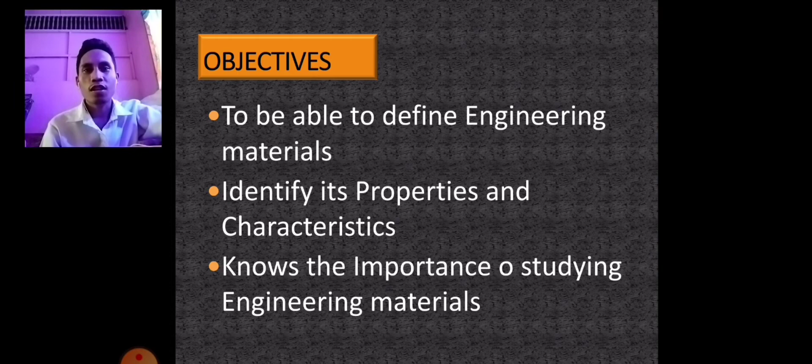Let's have first the definition of material science: the study of the properties of solid materials and how those properties are determined by material composition and structure. It includes elements of applied physics and chemistry, as well as chemical, mechanical, civil, and electrical engineering.

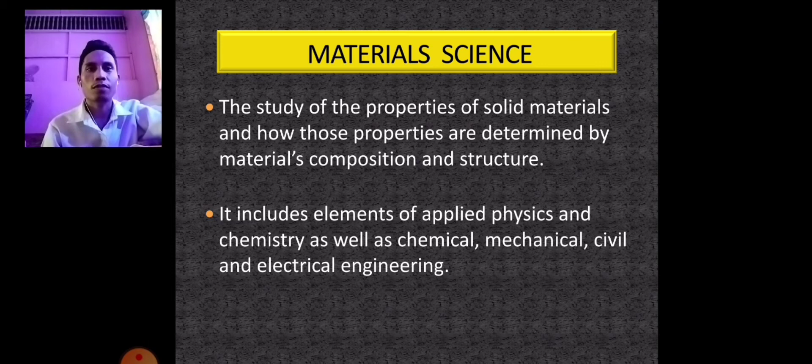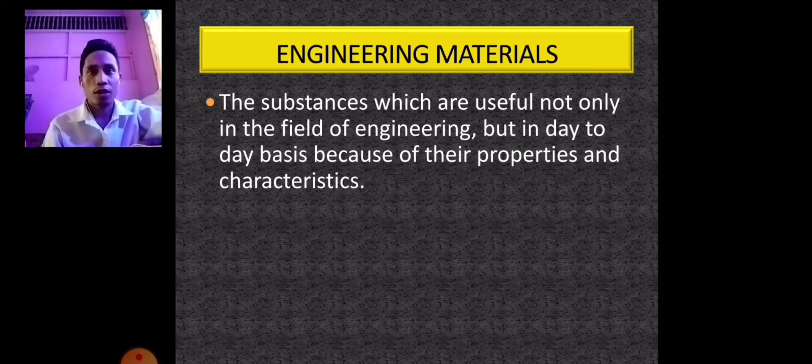Engineering materials are substances which are useful not only in the field of engineering, but on a day-to-day basis because of their properties and characteristics. Because we are dealing with engineering materials, we will be focusing on metals. These materials enable people to explore new designs and implementation of new products to improve the quality of modern life.

Properties of materials: the term property is a qualitative or quantitative measure of response of materials to externally imposed conditions like forces, temperature, etc. These properties include physical, mechanical, optical, thermal, electrical, chemical, magnetic, and technological properties.

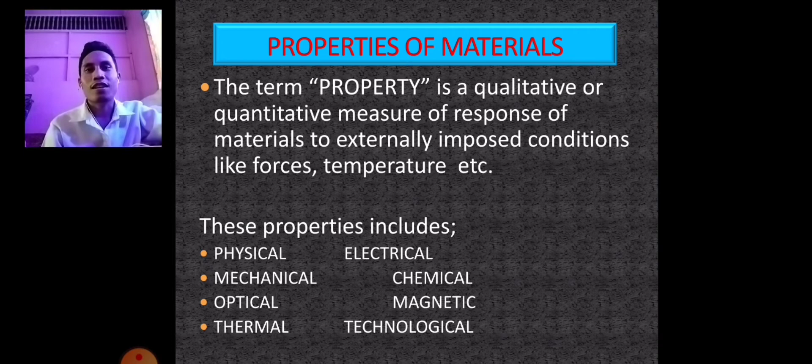Now we have the physical properties of materials. Those are distinguishing qualities or characteristics that are used to describe a substance in the absence of external forces. It is also the property that can be observed and measured without changing the composition of the material.

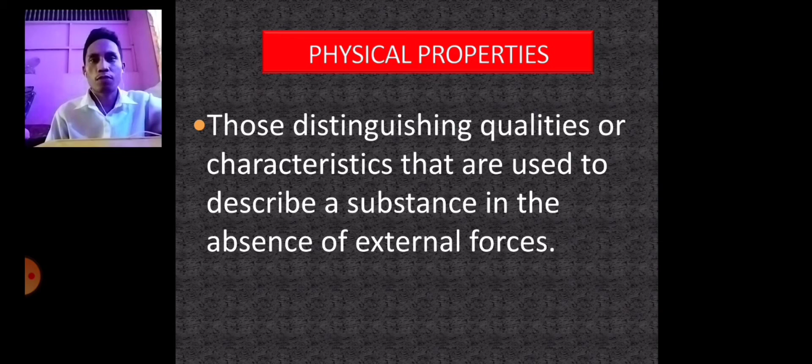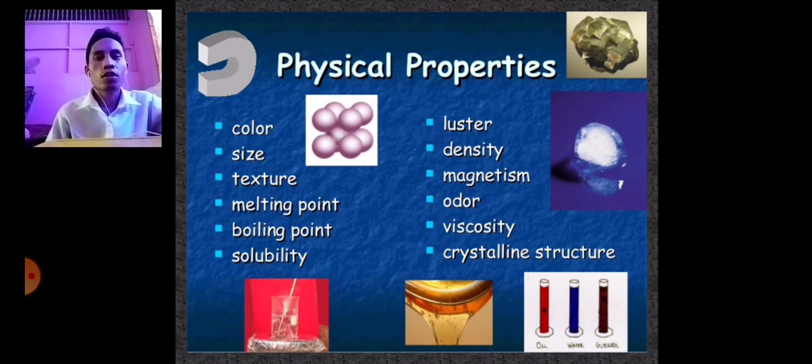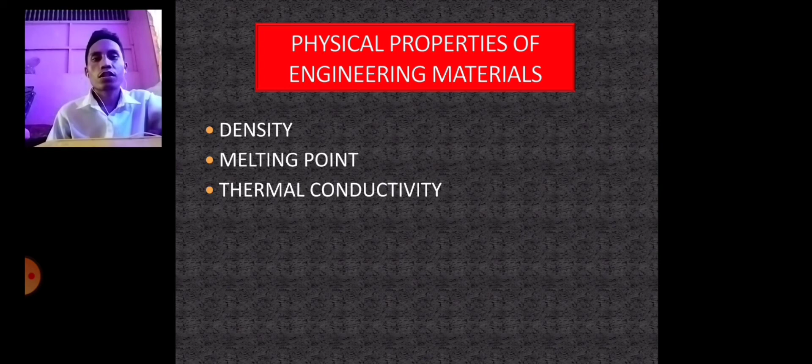So these are the common physical properties of material: color, size, texture, melting point, boiling point, solubility, luster, density, magnetism, odor, viscosity, and crystalline structure. But we will focus on density, melting point, thermal conductivity, electrical conductivity or resistivity, thermal expansion, and corrosion resistance of materials.

First, we have density. The formula is density equals mass over volume. This is common, defined as the mass per unit volume. The derived unit usually used is kilogram per meter cube.

Second, the melting point. It is the temperature at which solid becomes liquid at standard atmospheric pressure. As heat is applied to a solid, its temperature increases until it reaches the melting point of the material. An example is tungsten, which has the highest melting point of all metals, and mercury has the lowest melting point.

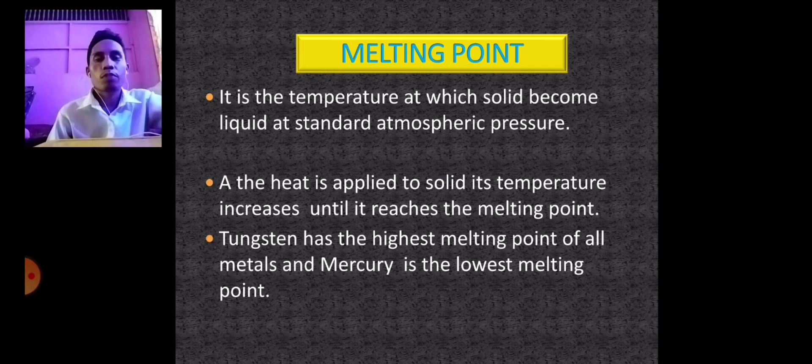The third is thermal conductivity. It is the ability of a material to conduct heat. It represents the quantity of thermal energy that flows per unit time through a unit area and temperature gradient, as K equals QD over A times delta T, where K is the thermal conductivity, Q is the amount of heat transferred, D is the distance between two isothermal planes, A is the area of surface, and delta T is the temperature difference. Common units used are watts per meter degree Kelvin, the SI unit, or BTU per hour times feet times degree Fahrenheit.

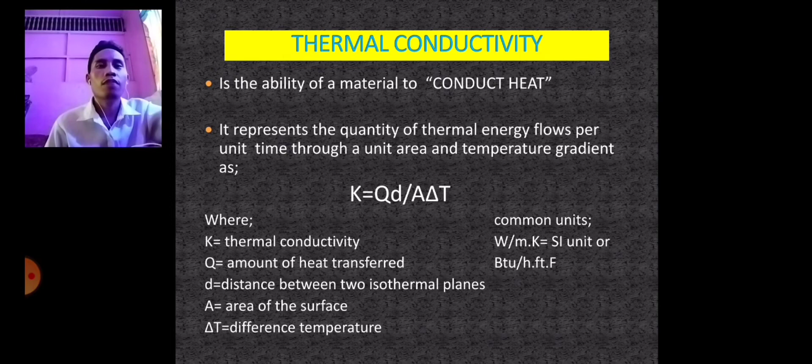Here is a picture showing where conduction takes place. As you can see, there are two isothermal planes, which are the pan and the holder. The holder is where the conduction of heat takes place.

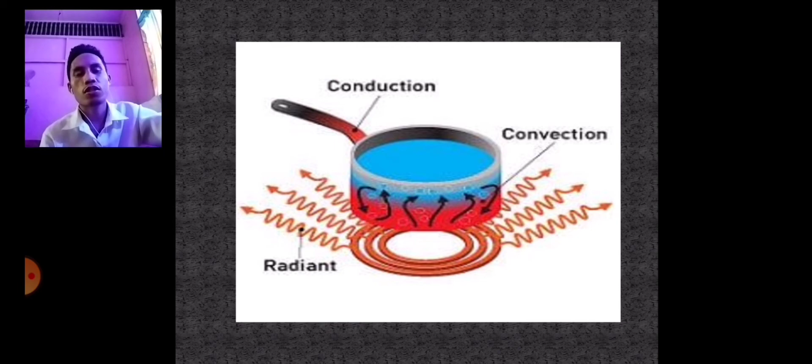Next is electrical conductivity or resistivity. It is defined as how much voltage is required to get an amount of electric current to flow. It also measures how strongly materials can resist electric current. This is very important to study, especially when manufacturing or building an airplane or other aircraft, because lightning could happen, and the airplane or other aircraft must be electric-proof to avoid accidents or any tragedy.

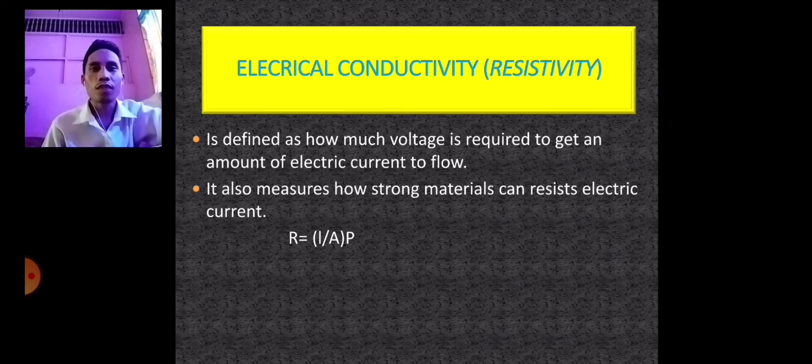So the formula is R equals l over A times p, where R is the resistance, l is the distance, A is the area of the sample, and small p is the specific resistance, with the unit ohm-meter.

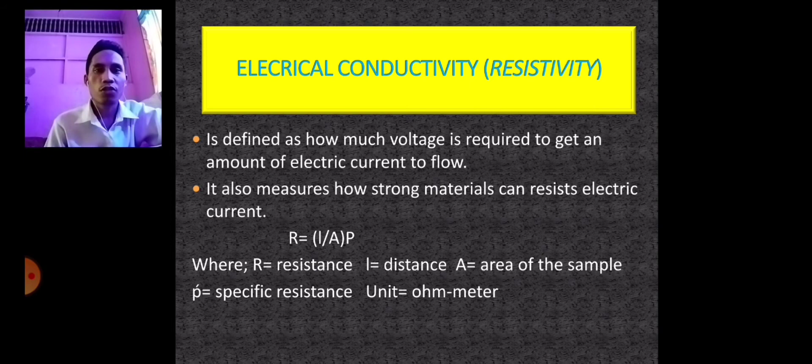Next is thermal expansion. Thermal expansion is the tendency of a material to change in shape, volume, and area in response to a change in temperature.

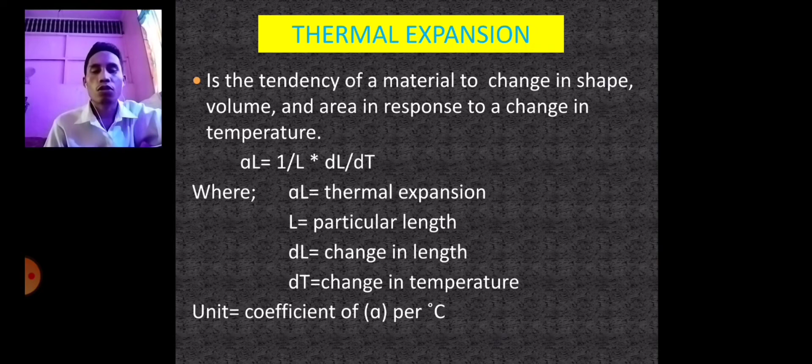Here is the formula: alpha L equals 1 over L times dL over dT, where alpha L is the thermal expansion coefficient, L is the particular length, dL is the change in length, and dT is the change in temperature. The unit is the coefficient alpha per degree Celsius.

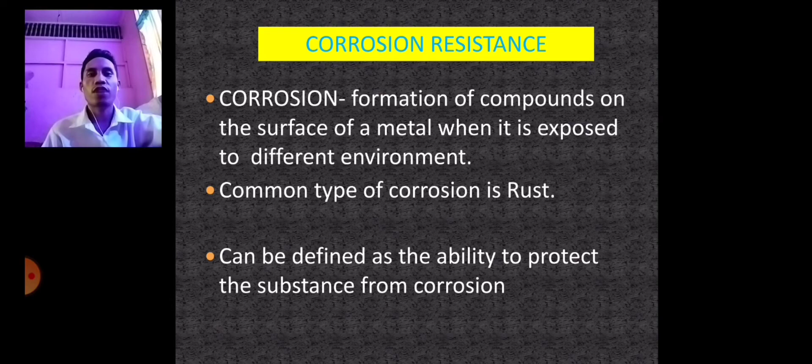Last is corrosion resistance. The last physical property of a material is corrosion resistance. Corrosion is the formation of compounds on the surface of a metal when it is exposed to a different environment. The common type of corrosion is rust. Corrosion resistance can be defined as the ability to protect the substance from corrosion.

Probably you will pick the iron nail. Yes, you are correct, because iron nail is very reactive to oxygen and moisture that forms iron oxide. Therefore, the iron nail will corrode faster than the other objects over time.

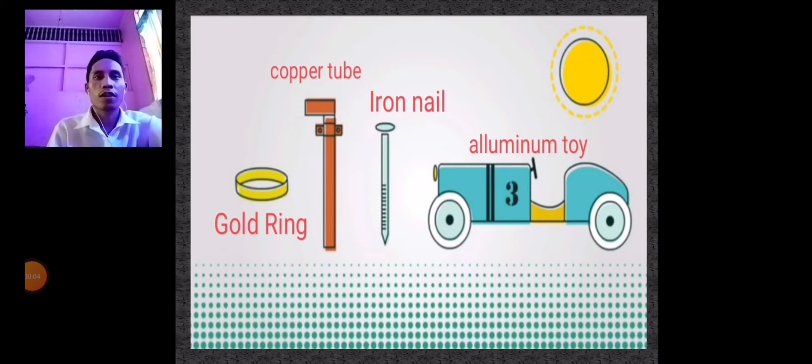In order to protect the iron nail from rusting or corrosion, we have some preventions. These are the common corrosion preventions: galvanization, coating the iron surface with zinc; electroplating, coating the iron surface with other metal; and last is painting.

So these preventions create a barrier for the metals to come in contact with oxygen and moisture, and therefore it resists corrosion or prevents the corrosion. That ends my topic, everyone.

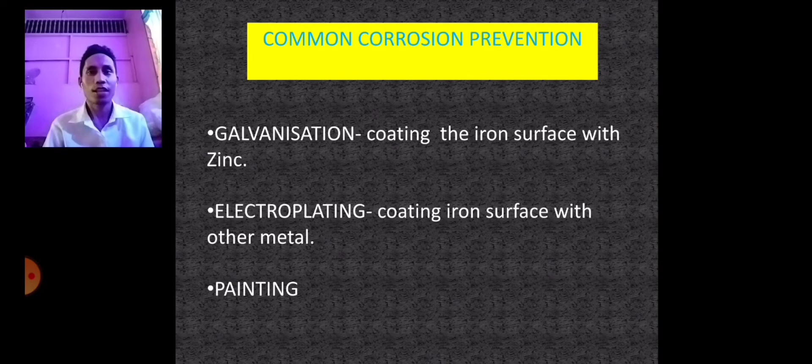So this morning everyone, today we will tackle mechanical properties. Those properties which describe the behavior of materials under the application of force are called mechanical properties. Characteristics such as strength, hardness, machinability, ductility, elasticity, and plasticity are included within this designation.

These properties are of great interest to the engineer who is called upon to select materials for machines and structures, and to determine the sizes of various members so that they will support loads adequately.

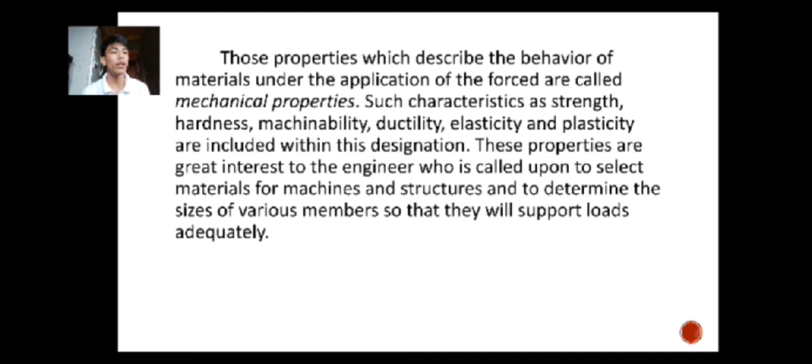So mechanical properties refer to the strength or behavior of a material when there is an applied force, or in simple terms, mechanical properties of a material are those properties that involve a reaction to an applied force on a material. So it can also help to classify and identify the material.

For example, in product sheets and plate, the rolling direction is called the longitudinal direction. The width of the product is called the transverse direction, the grain orientations, and standard wrought forms of metallic products.

As you can see, the mechanical properties of a material are not constant. For example, temperature below room temperature generally can cause an increase in the strength properties of metallic alloys, while its ductility, fracture toughness, and elongation usually decreases.

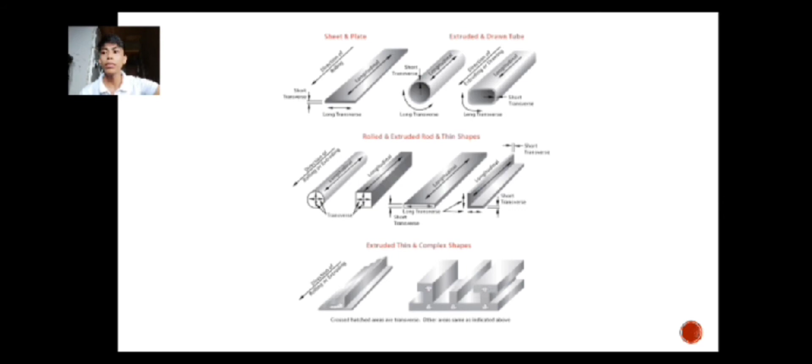So to further discuss and explain what mechanical properties are, there are six characteristics of mechanical properties that I included. First is the strength.

It is the property of a material which opposes the deformation or breakdown of material in the presence of external force or load. Materials which we finalize for our engineering products must have suitable mechanical strength to be capable of working under different mechanical forces or loads.

So strength of a material means that there will be no deformation, or in other terms, it is not easily cut or easily deformed.

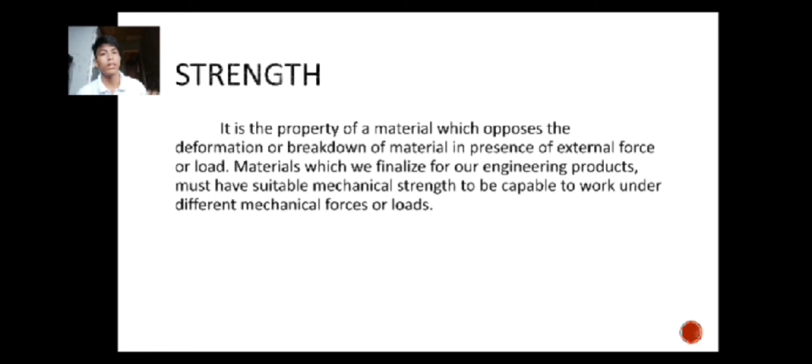Second is hardness. The hardness of materials is defined as the resistance of a specific material to localized plastic deformation or indentation. The term may also be used to describe the resistance of materials to scratching, abrasion, or cutting. In engineering, hardness is usually defined as resistance to penetration or machining.

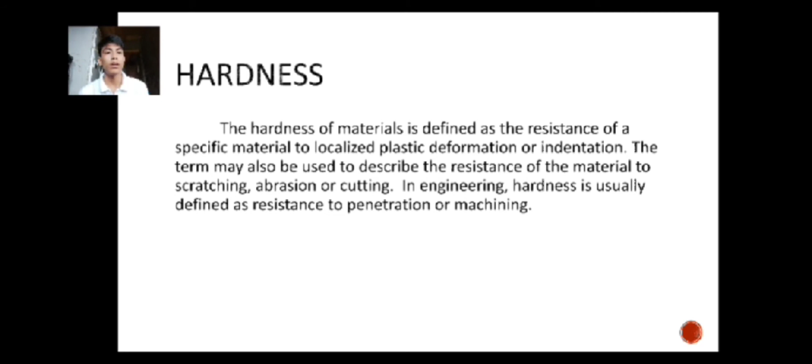So hardness is a resistance, so it is to not to do something, or to not be cut, or the hardness of a material is the difficulty to cut it. That is the hardness of materials.

So machinability is the ease with which a metal can be cut or machined, permitting the removal of material with a satisfactory finish. Materials with good machinability require little power to cut quickly, easily obtain a good finish, and do not wear the tooling much.

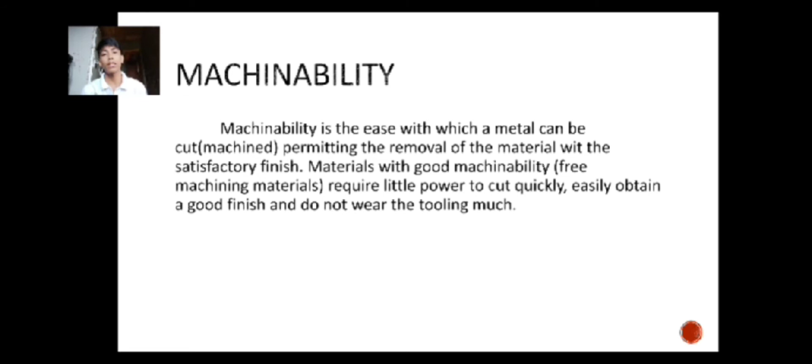So machinability of a material is the ease with which a material can be cut. That is the simple terms of machinability.

So ductility. Ductility is the ability of a material to sustain a large permanent deformation under a tensile load up to the point of fracture, or the relative ability of a material to be stretched plastically at room temperature without fracturing. So it's the ability of material to sustain a large permanent deformation.

So sustaining a large deformation, or its long elongation of a material, is how much it can be stretched.

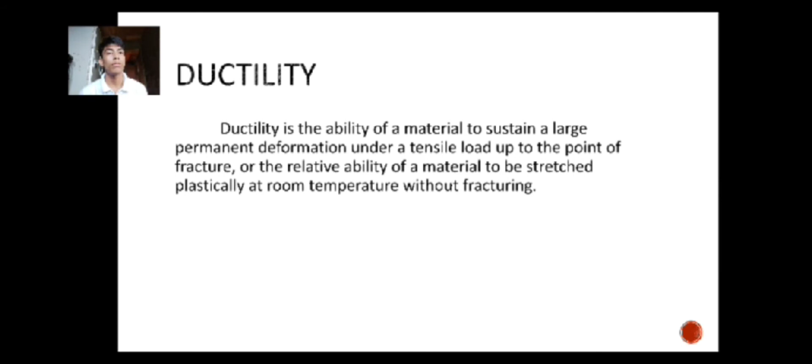So next is elasticity. When the external forces on a material are removed, the body returns to its original shape. The property of regaining the original shape upon the removal of external load is known as elasticity.

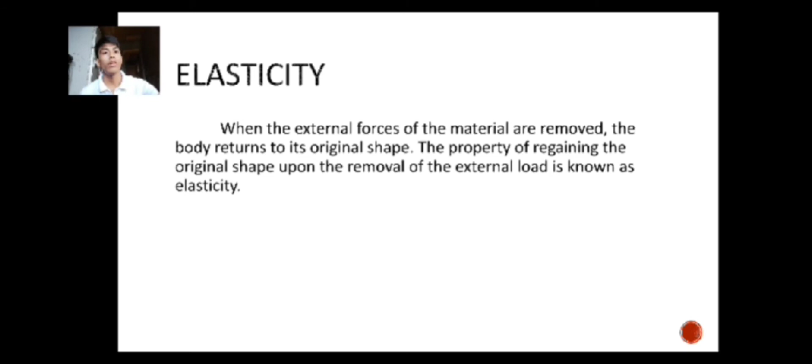So from its root word 'elastic,' which means regaining, it is the capability of a material to go back or regain its original form or original shape.

So next is plasticity. Plasticity is the property of a material by virtue of which permanent deformation can occur. Plasticity is really the opposite of elasticity.

So from the root word 'plastic,' according to its meaning, permanent deformation means it cannot be regained to its original form or original shape. So that is plasticity.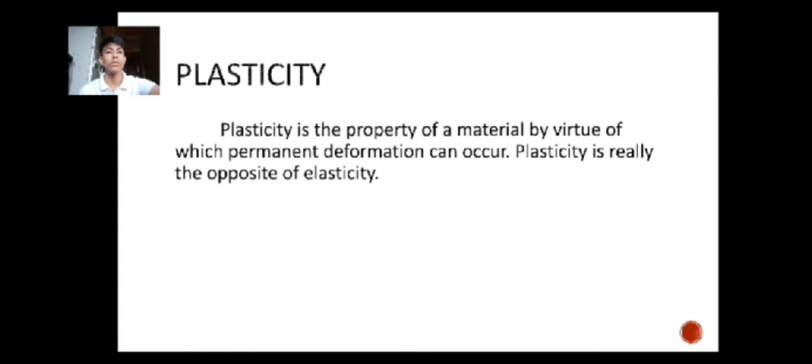So that's all for the characteristics of a material.

In order to use engineering materials in design, fabrication, or construction, a knowledge of mechanical properties is necessary. These properties are determined in the laboratory under fixed rules of procedure which govern the art of mechanical testing. A mechanical test may be defined as one in which all the variables affecting a given property are controlled, and the property in question is measured under fixed conditions. The effect of any variable upon this property can thus be specifically determined.

So mechanical test is to test the ability or the capability of a material. It is designed to ensure that materials are suitable for their intended application, so to its application of a material which it's gonna work for. Mechanical testing includes methods such as tensile strength, compression strength, impact resistance, fracture toughness, and fatigue. So mechanical testing is to test the capability.

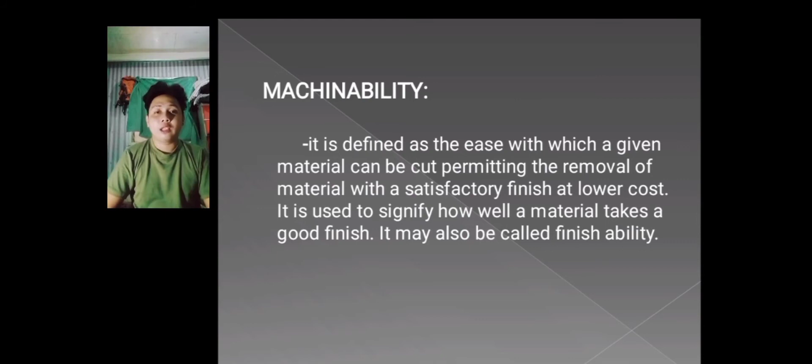So when we say machinability, it is a characteristic of a material such as metal that makes it easy to drill, shape, and cut. Materials with good machinability can be cut with relatively little power and low cost.

Second is weldability. It is defined as the capacity of a metal to be welded under the fabrication conditions imposed, in a specific suitably designed structure, and to perform satisfactorily in intended service. The real criteria in deciding the weldability of a material is the weld quality and the ease with which it can be obtained.

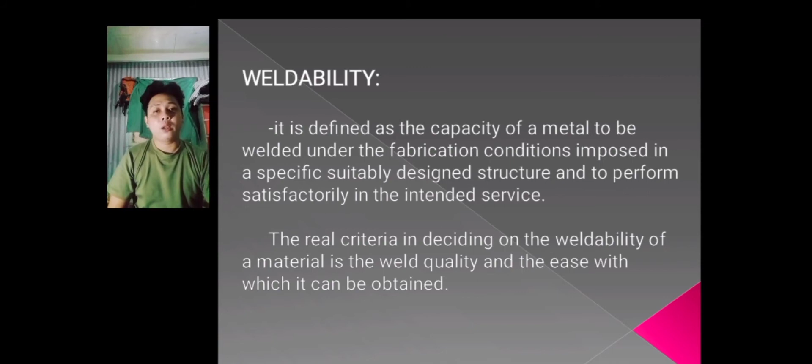So when we say weldability, it is also known as jointability. Jointability is the ability of any material to weld with the same materials. Usually we see materials, commonly metal and alloy, where two metallic parts, same or different metals, mix and fuse when welded. So that is weldability.

So the third one is castability. The ease with which a material can be cast into form is known as castability of the metal. It is based on factors like solidification rate, gas porosity, segregation, shrinkage, etc. Castability is the property of a metal which indicates the ease with which it can be cast into different shapes and sizes. Examples of materials used are aluminum and brass, which are possessing good castability.

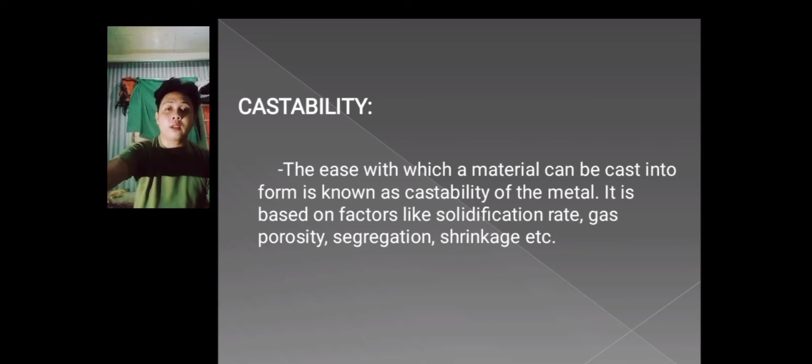So for the last one is formability. Formability is the ability of metals in forming different shapes. The various factors which govern to a large extent the flowability or ductility of the metal are metal structure, grain size, hot and cold working, alloying elements, softening heat treatments, annealing, and normalizing.

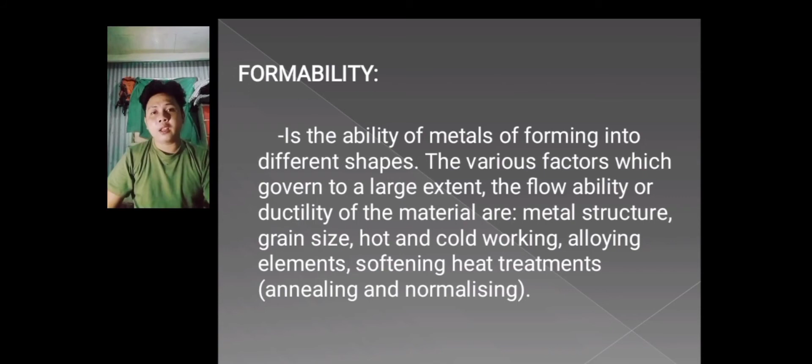So formability refers to a material's ability to undergo plastic deformation. When we deform a metal, heat is often used in the forming process. So the very important thing about deforming materials is a correct temperature, so the metal used is well formed and well built.

So for our next topic is optical properties of general engineering material. Optical property deals with the response of material against exposure to electromagnetic radiation, especially visible light. When light falls on a material, several processes such as reflection, refraction, absorption, scattering, etc. occur.

First is refraction. When light photons are transmitted through a material, they cause polarization of the electrons in the material, and by interacting with the polarized material, the photon loses some energy. As a result of this, the speed of light is reduced and the beam of light changes direction.

An example of refraction is if you put a pencil in a glass of water, you will see that the pencil appears bent in the water. It is because of refraction of light. So what is refraction of light? Refraction of light is the change in direction of light when it passes from one medium to another. When the light rays coming from the tip of the pencil pass from the water to air, they change direction.

That is, they get refracted. When these refracted rays reach our eyes, we trace them backwards as straight lines. Due to this, the rays appear to come from a point slightly above the original position. Hence, the pencil appears bent in water. So that is an example of refraction.

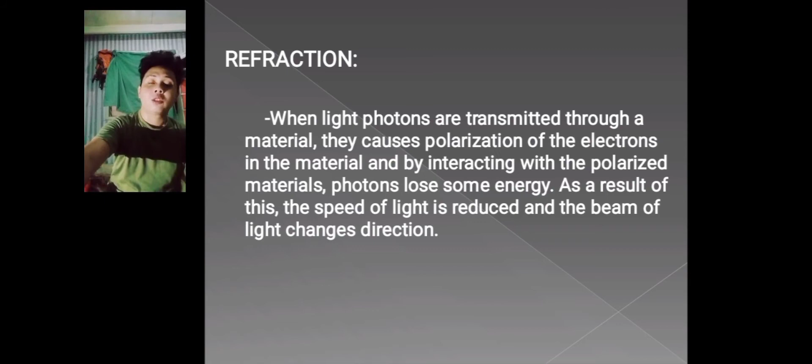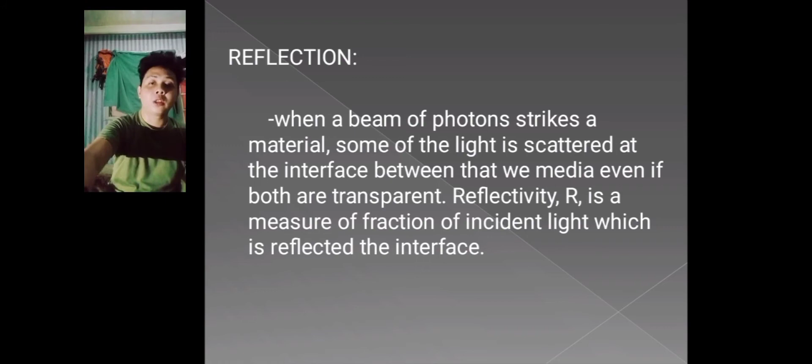The third one is absorption. When a light beam strikes a material surface, the portion of the incident beam that is not reflected is either absorbed or transmitted by the material. The fraction of the beam that is absorbed is related to the thickness of the material and the manner in which photons interact with the material's structure. So absorption refers to a material taking in light and not reflecting it back. For example, when light strikes a black surface, it is absorbed by the surface and nothing is reflected. So when white light strikes a leaf, you can easily identify it as a green surface.

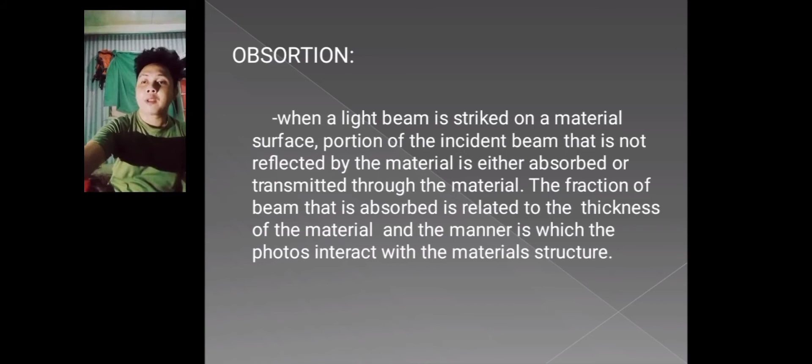That is absorption. So the fourth one is Rayleigh scattering. Here a photon interacts with the electron orbiting an atom; it is deflected without any change in photon energy. This is more significant for atoms with high atomic number and for lower photon energies. For example, blue light in sunlight gets scattered more than other colors in the visible spectrum, thus making the sky look blue. Rayleigh scattering is wavelength dependent, with shorter wavelengths being more scattered. From molecules in the atmosphere, this gives rise to the blue sky we see on a fine day. The blue light from the sun striking the upper atmosphere is scattered approximately 10 times more than red light.

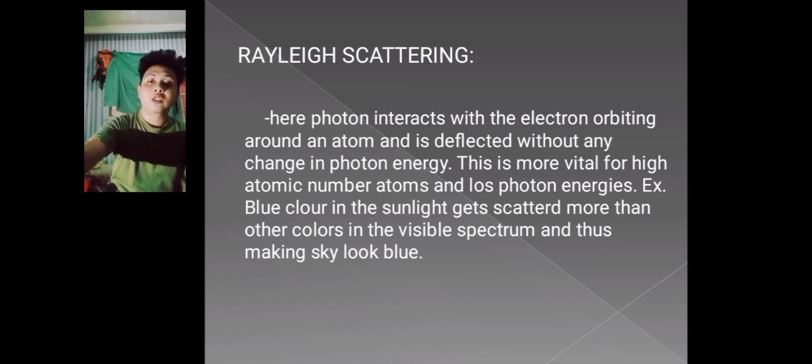So overhead, the blue light is scattered into the eye of an observer while the red light goes largely unscattered. That's why we see the sky as blue. So the fifth one is transmission. The fraction of the beam that is not reflected or absorbed is transmitted through the material. Thus, the fraction of light transmitted through a transparent material depends on the losses incurred by absorption and reflection. So transmission refers to the passing of light through some materials. An example is when light passes through glass — when light passes through a glass window, it is transmitted to the other side, allowing light to pass through. Different materials have different ways of transmitting light. Examples are transparent objects, which allow you to see clearly through them, while translucent objects only let some light through — you cannot see clearly through a translucent object.

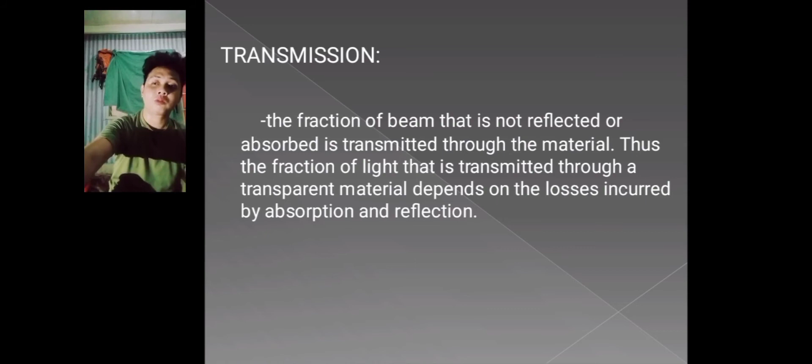So the last one is thermal emission. When a material is heated, electrons are excited to higher energy levels, generally in the outer energy levels where electrons are less strongly bound to the nucleus. These excited electrons, upon returning to the ground state, release photons in a process termed thermal emission. So thermal emission is the process involving the emission of photons from a heated surface. Thermal radiation is conducted via electromagnetic waves, arising from heat. This form of heat transfer is a function not only of the temperature difference between two surfaces, but also the frequency range of emitted and received energy. As an example, sunlight is composed of the visible light spectrum as well as infrared and ultraviolet energy. So that is thermal emission.

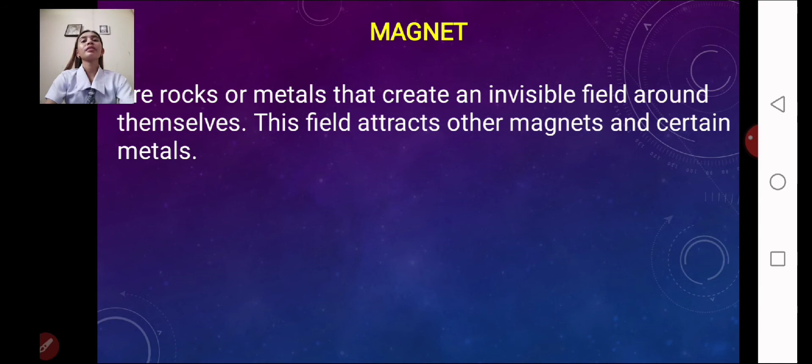So, the word magnetic comes from the word magnet — rocks or metals that create an invisible field around themselves. This field attracts other magnets and certain metals. We all know what a magnet is because we already see it in our surroundings. Magnetism is a physical phenomenon produced by the motion of electric charge, resulting in attractive and repulsive forces between objects. So with magnetism, where the action takes place, it's either attraction or repulsion forces between two or more objects.

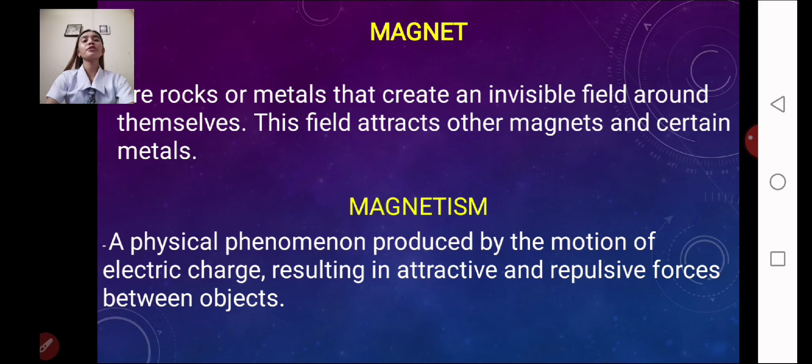Bohr magneton: the magnetic moment due to the spin of an electron is known as the Bohr magneton, or M sub B. The Bohr magneton, named for the 20th century Danish physicist Niels Bohr, is equal to about 9.274 times 10 to the negative 24 ampere square meter, where Q is the charge on the electron, H is Planck's constant, and M sub E is the mass of the electron. The Bohr magneton is the most fundamental magnetic moment.

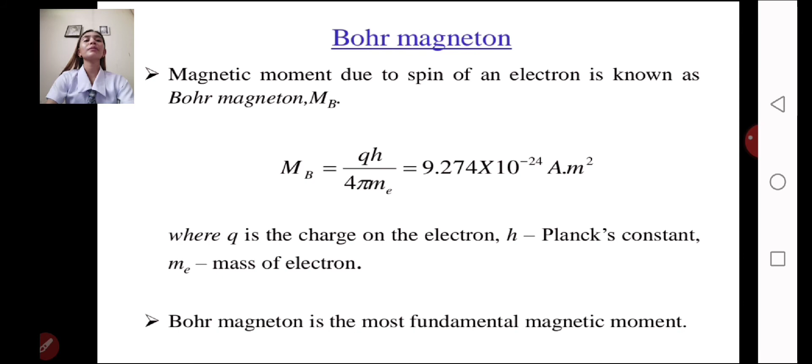The magnetic properties of materials are those which determine the ability of a material to be suitable for a particular magnetic application. There are many magnetic properties of materials.

The permeability, retentivity or the magnetic hysteresis, coercive force, and reluctance.

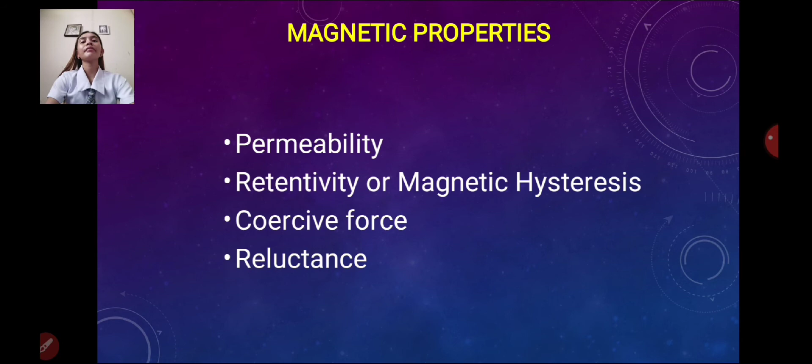The permeability is the property of magnetic material which indicates how easily the magnetic flux is built up in the material. Sometimes it is also called the magnetic conductivity of material. It is determined by the ratio of magnetic flux density to the magnetizing force producing this magnetic flux density.

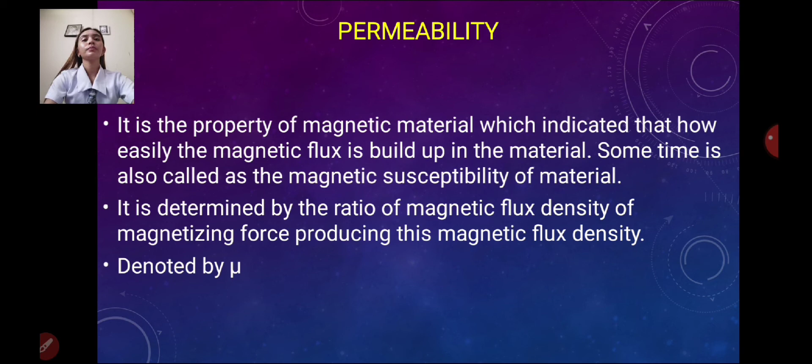Denoted by mu. Hence, mu equals B over H, where B, the magnetic flux density in material, is in Weber per meter square, and H, the magnetizing force or magnetic flux intensity, is in Weber per Henry meter. So the unit of magnetic permeability is Henry per meter.

Permeability of material is also defined as mu equals mu 0 times mu r, where mu 0 is the permeability of air or vacuum, and mu 0 equals 4 pi times 10 to the power of negative 7 Henry per meter, and mu r is the relative permeability of material. Mu r equals 1 for air or vacuum.

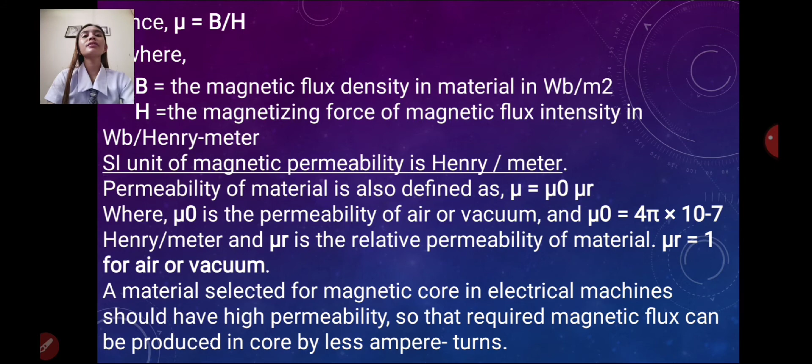A material selected for magnetic core in electrical machines should have high permeability so that the required magnetic flux can be produced in the core by fewer ampere turns. Examples of such electrical machines are refrigerators, washing machines, flat irons, and more.

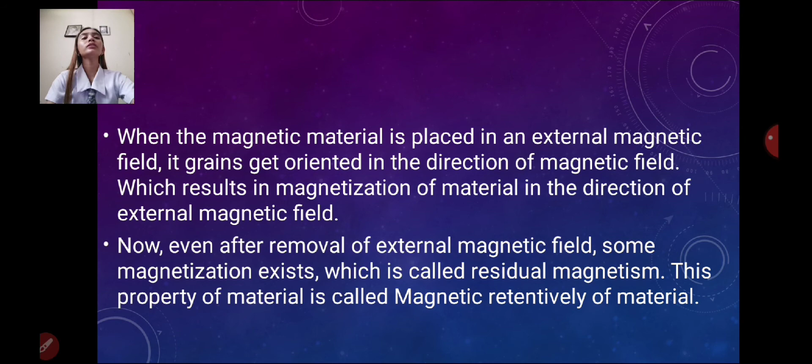When the magnetic material is placed in an external magnetic field, its grains get oriented in the direction of the magnetic field, which results in magnetization of the material in that direction. Even after removal of the external magnetic field, some magnetization exists, which is called residual magnetism. This property of material is called retentivity or magnetic retentivity.

So the hysteresis loop, or the B-H curve, of a typical magnetic material is shown in the figure below. Let us discuss first what is a hysteresis loop. The hysteresis loop shows the relationship between the magnetic flux density and the magnetizing field strength.

Before that, what is magnetic flux? Magnetic flux is a measurement of the total magnetic field which passes through a given area. The loop is generated by measuring the magnetic flux coming out from the ferromagnetic substance while changing the external magnetizing field. So let us discuss what the hysteresis loop looks like.

The magnetic flux density B increases when the magnetic field strength H is increased from 0, increasing the magnetism, and finally reaching point P, which is called saturation, the point where B becomes constant.

With a decrease in the value of the magnetic field, there is a decrease in the value of magnetism. But when both B and H are equal to 0, the substance or material retains some amount of magnetism, which is called retentivity or residual magnetism. When there is a decrease in the magnetic field towards the negative side, magnetism also decreases.

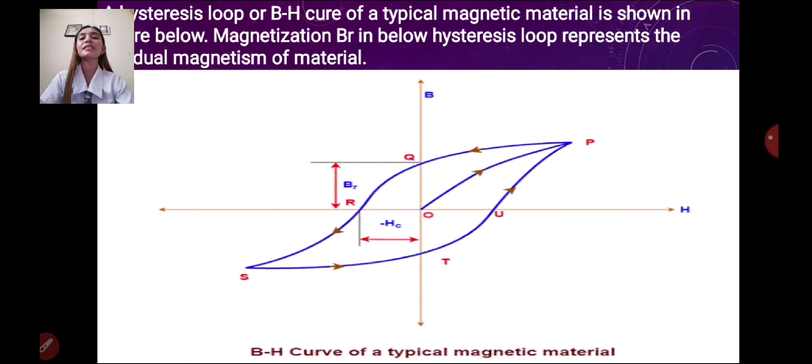In the opposite direction, the cycle continues where the saturation point is S, the retentivity point is T, and the coercive force is U. Due to this forward and opposite direction process, the cycle is complete, and this cycle is called the hysteresis loop. The advantage of the hysteresis loop is that a small region of the loop indicates less hysteresis loss. A hysteresis loop shows the importance of electromagnetism in a substance.

So the coercive force, as mentioned earlier, due to the retentivity of material, even after removal of the external magnetic field, some magnetization exists in the material - this is the retentivity or residual magnetism of material. To remove this residual magnetization, we have to apply some external magnetic field in the opposite direction.

This external magnetomotive force, or ampere-turns, required to overcome the residual magnetism is called the coercive force of the material. So it is the amount of reverse, negative H, external magnetizing field required to completely demagnetize the substance. That is how coercive force works.

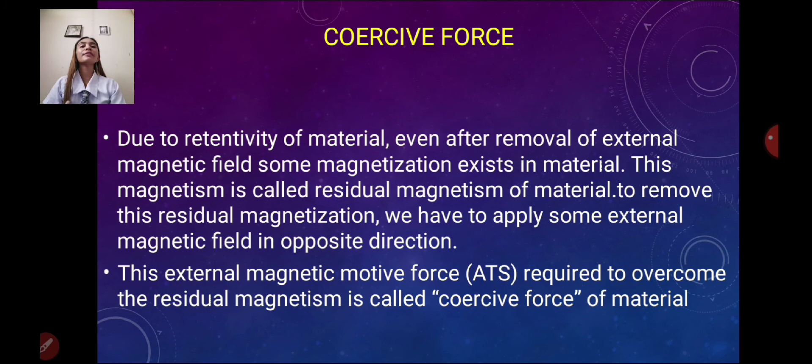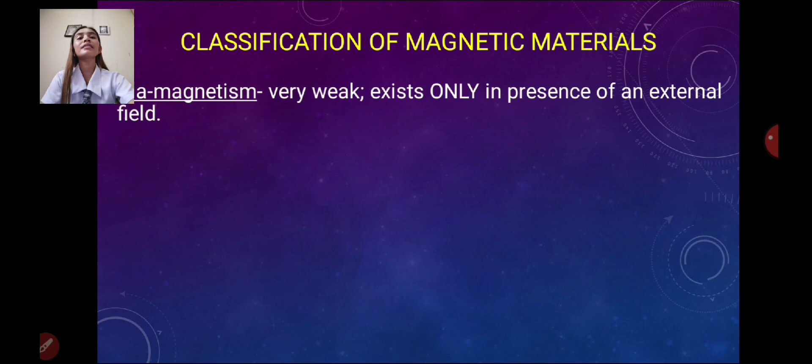So, classifications of magnetic materials: diamagnetism, paramagnetism, and ferromagnetism. Ferromagnetism also has two subclasses, antiferromagnetism and ferrimagnetism.

Diamagnetism is very weak, from the word dia, and exists only in the presence of an external field. Paramagnetism is slightly stronger; when an external field is applied, dipoles line up with the field, resulting in a positive magnetization. However, the dipoles do not interact.

Ferromagnetism is very strong; dipoles line up permanently upon application of an external field, and it has two subclasses. Antiferromagnetism: dipoles line up but in opposite directions, resulting in zero magnetization. Ferrimagnetism: similar to antiferromagnetism, but dipoles of varying strength cannot cancel each other out.

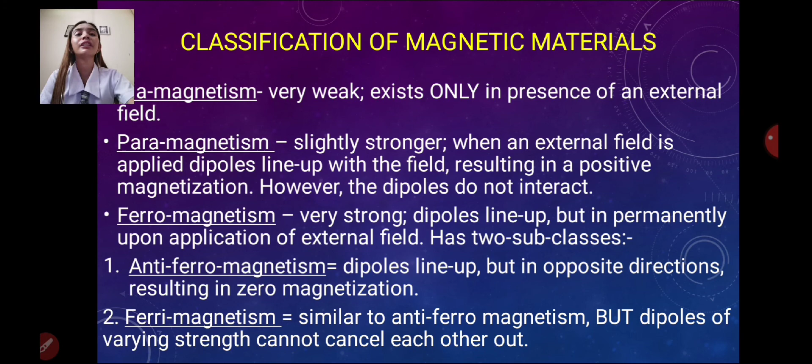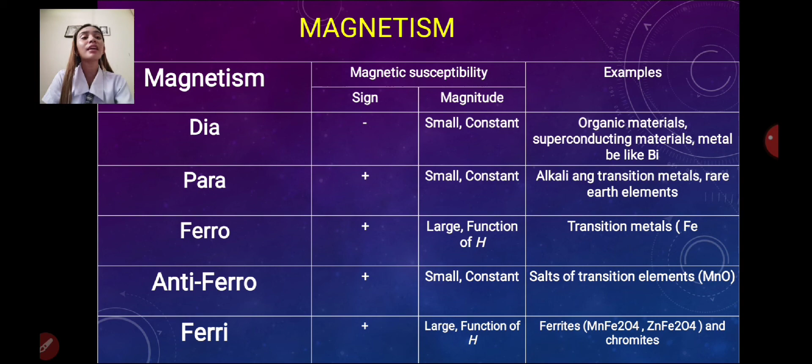Examples of dia include organic materials, because they cannot attract other metals, and superconducting materials. Para includes alkali and transition metals and rare earth elements. Ferro includes transition metals like iron. Antiferro includes salts of transition metal elements. Ferri includes ferrites and chromites.

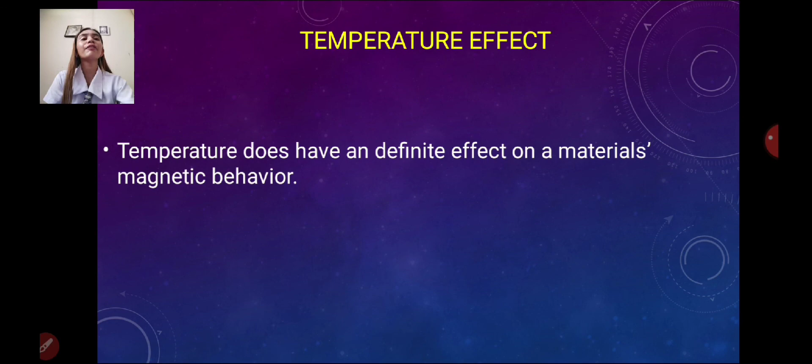Let us proceed to the temperature effect. Temperature does have a definite effect on a material's magnetic behavior. With rising temperature, the magnitude of atomic thermal vibration increases, which may lead to more randomization of atomic magnetic moments as they are free to rotate.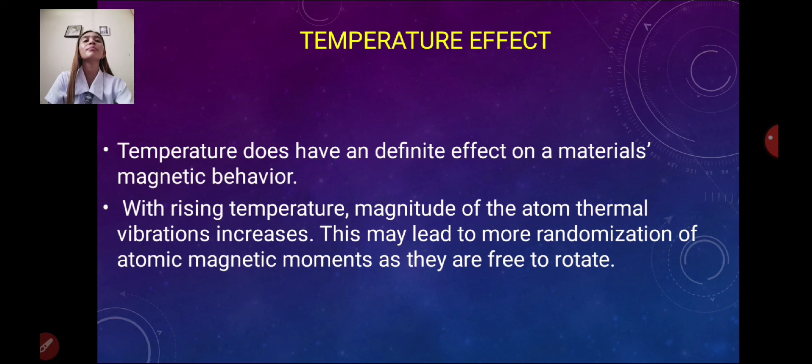Usually, atomic thermal vibrations counteract forces between adjacent atomic dipole moments, resulting in dipole misalignment up to some extent, both in the presence and absence of external fields. So it depends on the temperature.

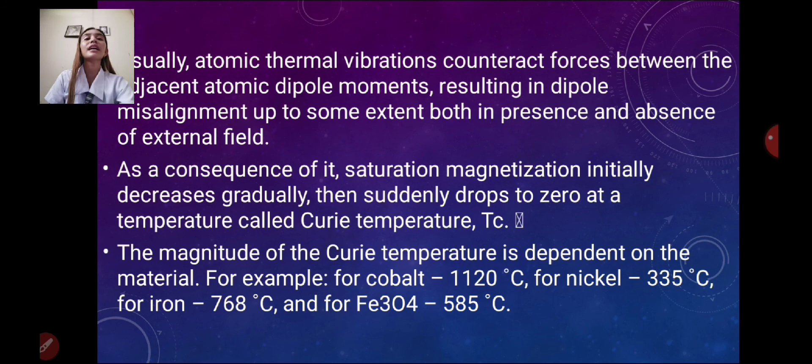As a consequence, saturation magnetization initially decreases gradually, then suddenly drops to zero at a temperature called the Curie temperature, or T sub C. The magnitude of the Curie temperature depends on the material. For example, cobalt is 1120 degrees Celsius, nickel is 335 degrees Celsius, iron is 768 degrees Celsius, and Fe3O4 is 585 degrees Celsius.

Regarding magnetic domains: in addition to susceptibility differences, the different types of magnetism can be distinguished by the structure of the magnetic dipoles in regions called domains.

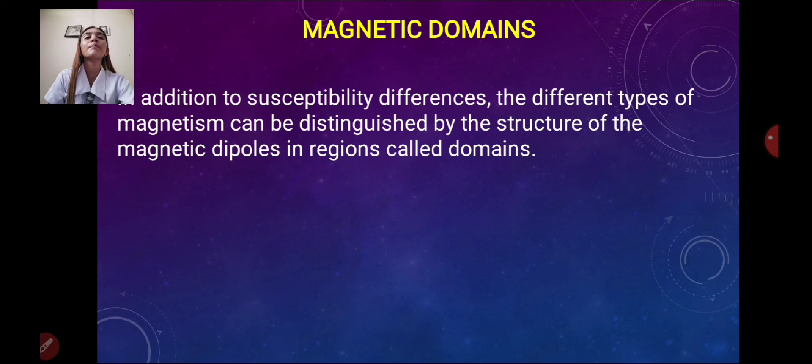Each domain consists of magnetic moments that are aligned, giving rise to a permanent net magnetic moment per domain. Each of these domains is separated from the rest by domain boundaries, or domain walls. Boundaries, also called Bloch walls, are narrow zones in which the direction of the magnetic moment gradually and continuously changes from that of one domain to that of the next.

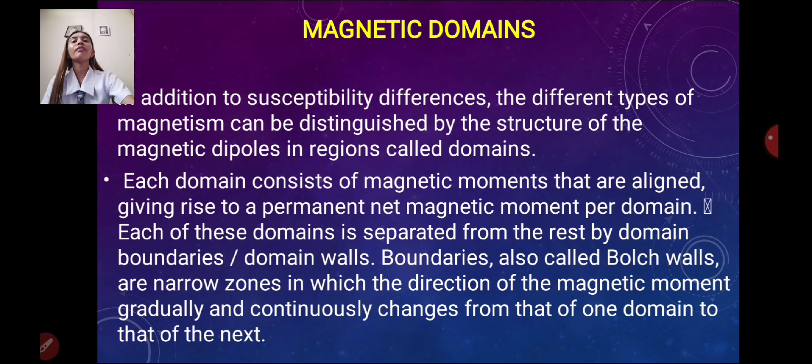Magnetic domains are typically very small, about 50 micrometers or less, while Bloch walls are about 100 nanometers thick. For a polycrystalline specimen, each grain may have more than one microscopic-sized domain. Domains exist even in the absence of an external field.

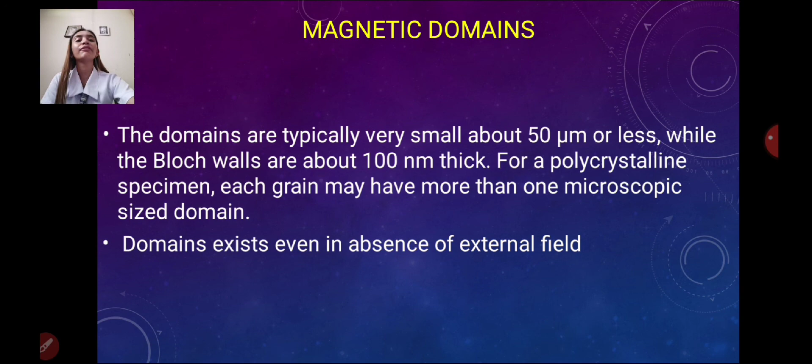The average magnetic induction of a ferromagnetic material is intimately related to the domain structure. When a magnetic field is imposed on the material, domains that are nearly lined up with the field grow at the expense of unaligned domains. This process continues until only the most favorably oriented domains remain.

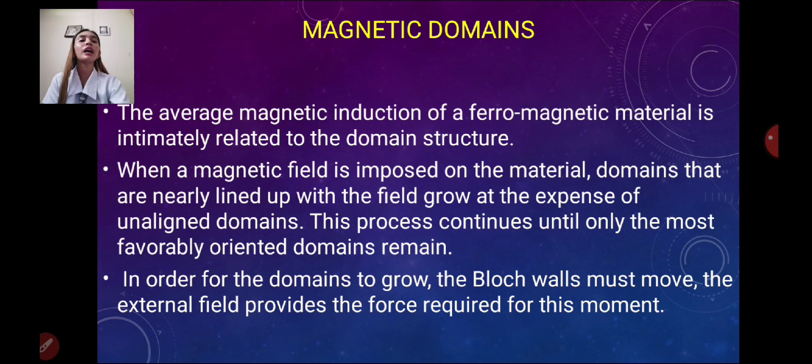In order for the domains to grow, the Bloch walls must move. The external field provides the force required for this movement, causing the Bloch walls to move so that the domains will grow.

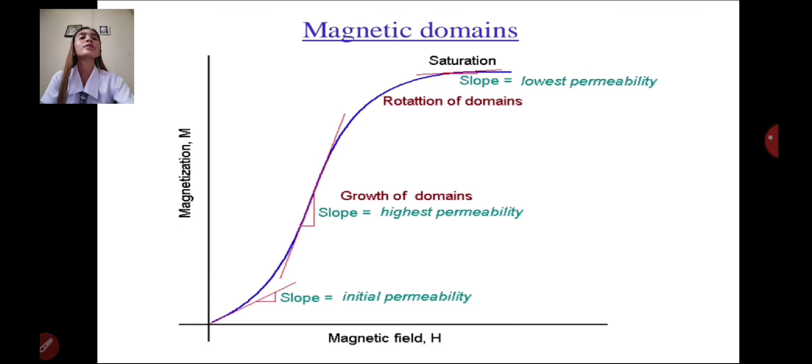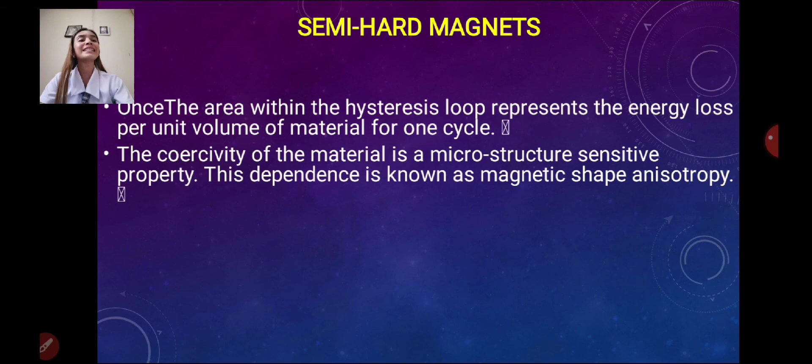For semi-hard magnets, the area within the hysteresis loop represents the energy loss per unit volume of material for one cycle. The coercivity of a material is a microstructure-sensitive property; this dependence is known as magnetic shape anisotropy. The coercivity of recording materials needs to be smaller than that of others, since data written on a data storage medium should be erasable. On the other hand, the coercivity value should be higher since the data needs to be retained.

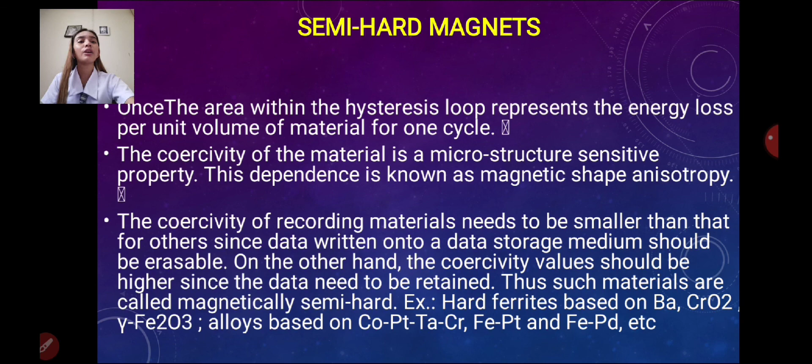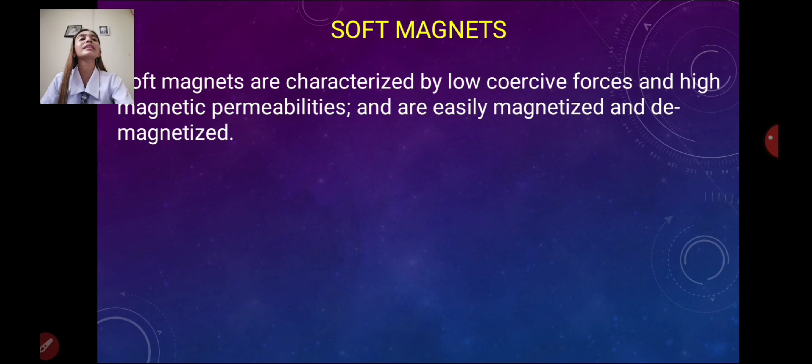So, regarding soft and semi-hard magnets: examples include hard ferrites, alloys, and soft magnets. Soft magnets are characterized by low coercive force and high magnetic permeabilities, and are easily magnetized and demagnetized. They generally exhibit small hysteresis losses. Applications of soft magnets include cores for electromagnets, electric motors, transformers, generators, and other electrical equipment.

Examples include ferrous nickel alloy, ferrites, and garnet. Soft magnets are temporary magnets; the hysteresis loop area is small, and the retentivity and coercivity are also small. Soft magnets can be produced by heating and gradual cooling.